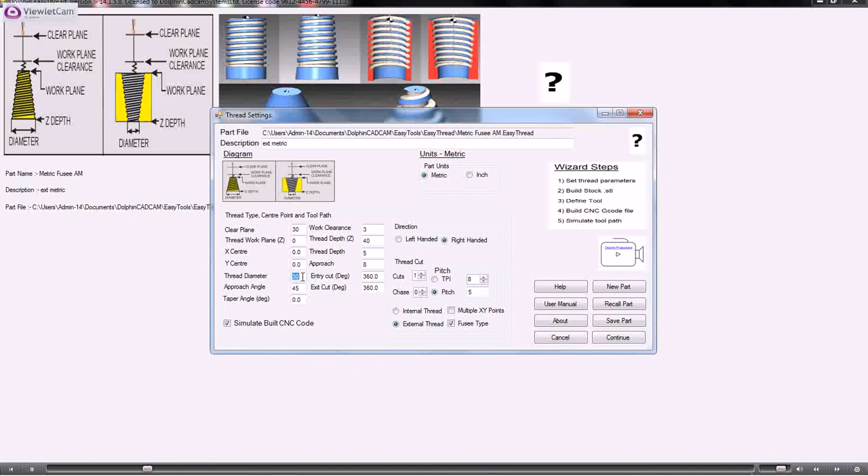The thread depth is the overall depth that you want to cut to. The thread depth here is the tooth thread for each pass, and the thread diameter is a position around the fusee thread. So if we look here, this is the fusee type shape that's been imported, and the thread depth is this one just here.

The number of cuts and the pitch is the same as for all other threads.

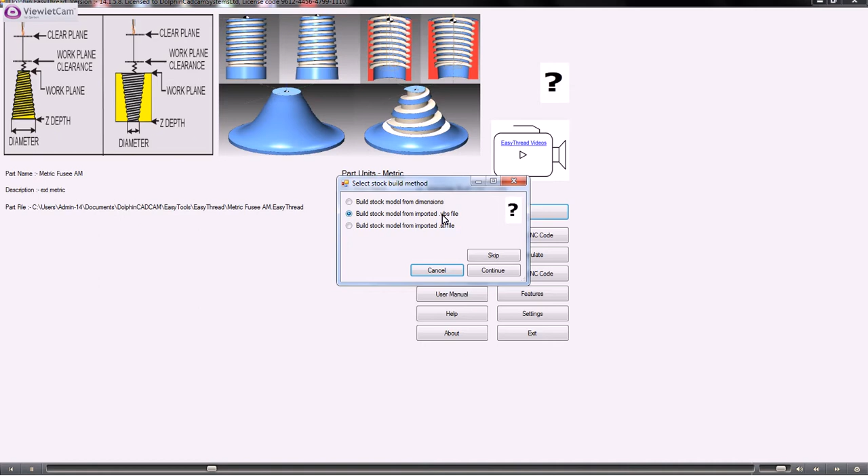So we continue on. The stock model needs to be built from an imported VBS file. The VBS file is a Visual Basic script which is created using the PartMaster CAD system and then just transferred through via Visual Basic. But you don't need to know anything about Visual Basic - it's just a format that we use to transfer the data from one program to the next.

So within the CAD system you create the drawing, which is this type of drawing here, using the curve fitting routine, and then we create the VBS script from that automatically. That will be covered in a separate video, but the result is that you end up with this type of shape, which is the fusee curve.

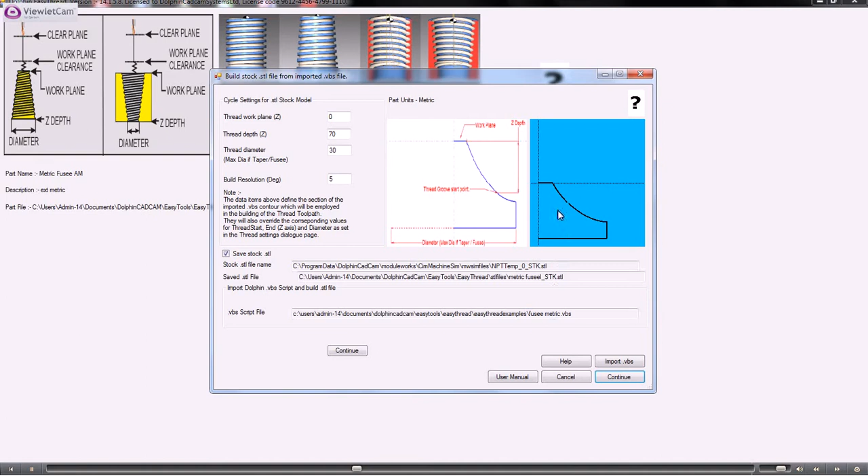So we will need to just browse for the folder where the Visual Basic script is kept, and then we import it, and then when that's imported you'll see the resultant shape just here.

So if we continue on to the tool - again the tool length and the tool flute diameters and so on are the same as for internal or external threads. One thing that you probably will need to do on a fusee thread is to say that we're having a flat tip here rather than a pointed tip, or rather than a radius tip. So for most cases the fusee thread needs to be cut with a flat tipped tool like that.

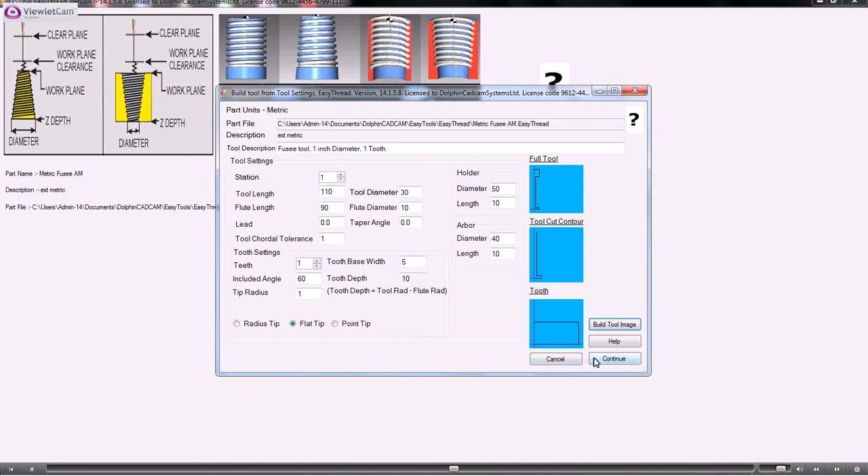So we continue - this is going to create the G-code file, and that will then call up the simulator when that's created. Now the fusee threads are quite complex in their description, so the simulator will take a second or two to load because there's a lot of information and a lot of cutting parameters being loaded for the G-code file.

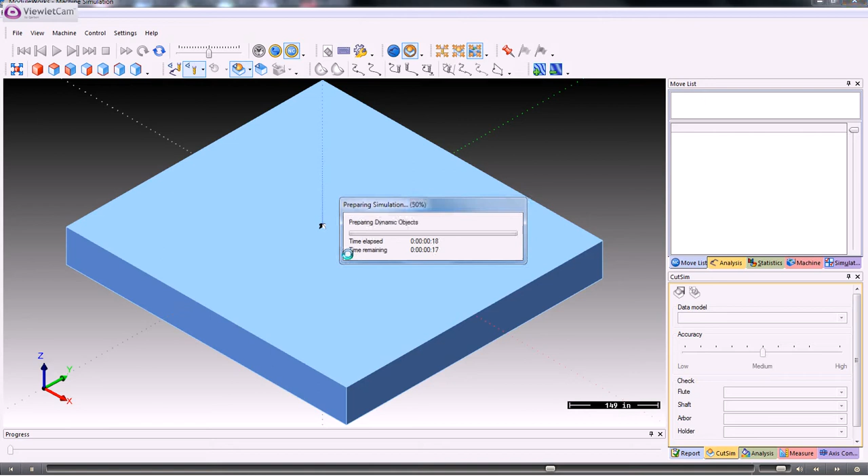Okay, so that's the tool and the fusee stock that we have. This is the shape that was created in the CAD system and imported as a VBS file.

One thing to bear in mind is when you're running the simulator, go to the Cutsim tab here and set the accuracy to something below medium. If you set it to very high, then the system will need quite a lot of memory. So if you have any problems with memory, then set your simulation accuracy down to between low and medium.

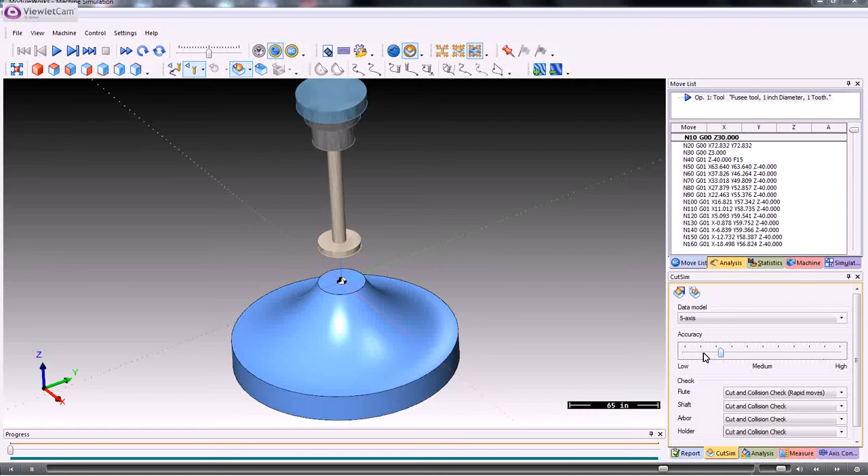So let's just run the simulator now.

Okay, so that's the fusee thread, as you can see. This is where the chain link will go between this gear and the next gear on the inside your clock or watch mechanism. Okay, so that's how to do a fusee thread.